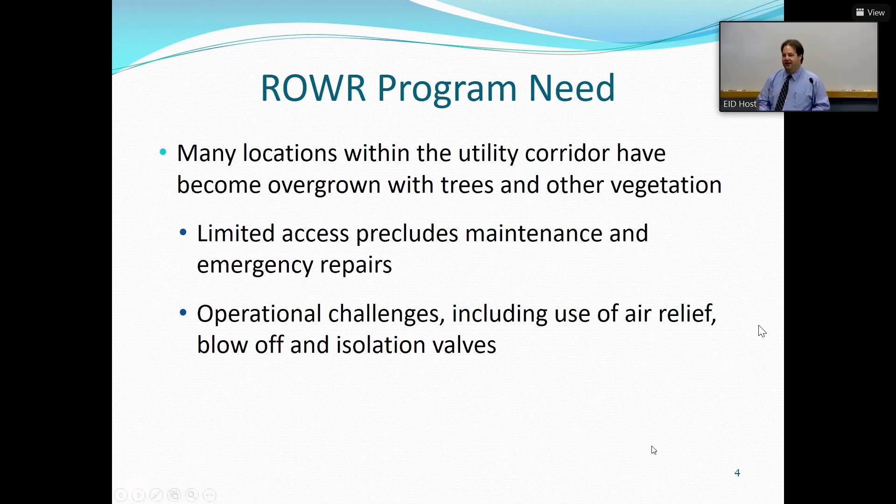Continuing the summary of issues, we think it's important to provide you with a summary of issues and an update on what has been happening since implementation of the ROWR program.

District crews are currently completing work along Camino Conduit. That work has been mostly located on EID and federally owned property, as well as some private property in the Pollock Pines area. It's important to note these are also areas where no sensitive resources are likely present, and the current work qualified as exemptions under CEQA.

The ISMND for the program is intended to streamline the ROWR activities. Since the program will cover the whole 88-mile transmission system, the ISMND will provide a roadmap for staff to follow, so resource surveys and regulatory authorizations can be completed in advance of crews working in sensitive areas. To summarize the benefits, it's time consuming and costly to move heavy equipment around. It'll allow crews to work in a linear fashion, and the program roadmap would ultimately result in more efficiency and cost savings.

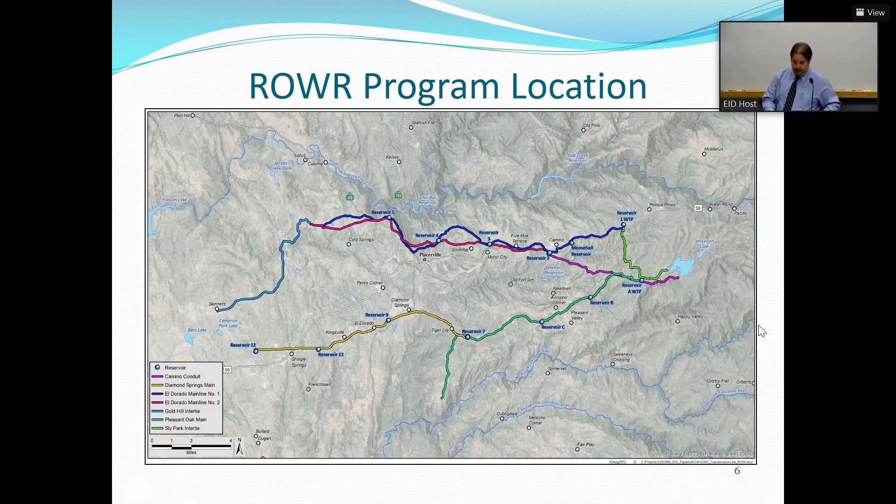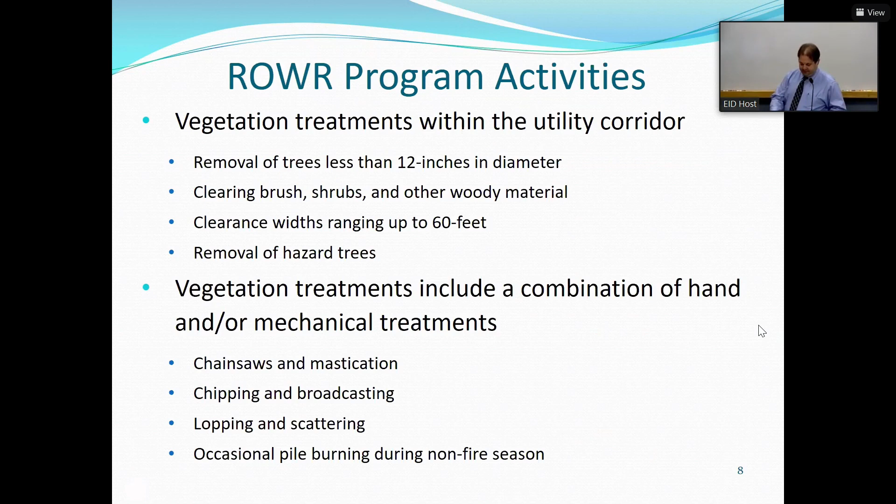Now I'd like to provide you with more detail regarding the environmental review process for the proposed program, which means prior to approving the program, EID must consider the potential environmental effects of implementing the program. As board members, you're aware the district must comply with the California Environmental Quality Act, or CEQA, the CEQA guidelines, and EID's procedures to implement CEQA.

The purpose of CEQA is to describe the potential environmental impacts of the program, identify ways to avoid or lessen those impacts, and then promote coordination with public agencies and encourage public participation. CEQA also provides agencies and the public an opportunity to engage in the review process as well.

The activities necessary to implement the ROWR program require environmental review by the district pursuant to CEQA, where EID is the lead agency under CEQA. Staff prepared an ISMND, which evaluated the potential environmental effects associated with the program. The ISMND resulted in a mitigation monitoring reporting program, which essentially provides the roadmap for crews and staff, and identifies the feasible mitigation measures that avoid, mitigate, or reduce potential environmental effects to a less than significant level.

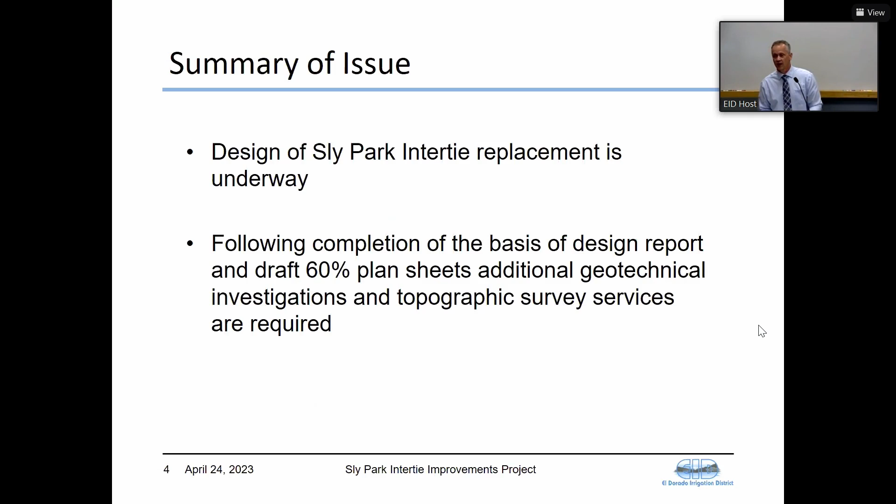Summary of the issues why we're here today: again, we are under design for the Sly Park Intertie. We've completed the basis of design report and draft 60% design of the project. During that process, we've identified additional geotechnical investigations that are needed, as well as additional topographic survey services.

So again, this is an overview of the project alignment. The project extends from Reservoir 1 down to Reservoir A, just downstream from Sly Park Dam. Our initial hope during construction was that we have easements in place and that we could basically replace the pipeline in place, and largely that's the case.

However, as we've reviewed the initial survey data that came in, our title documents, and aerial data, we've discovered several areas along the pipeline alignment where we're going to have to vary the alignment, shift it left to right, 5 to 10 feet. That's for numerous reasons. One is that, again, when this was built under emergency conditions, we didn't optimally place the pipeline. So in several locations, the pipeline butts right up against property lines, which makes it non-constructable in the existing alignment.

So the largest reason we're doing this geotech work is to minimize risk, both for the district for change orders as we get into construction, and also to minimize the risk premium our contractor will put on by identifying the soil and what they're going to have to dig through if any adjustments are needed outside this alignment, which we are intending.

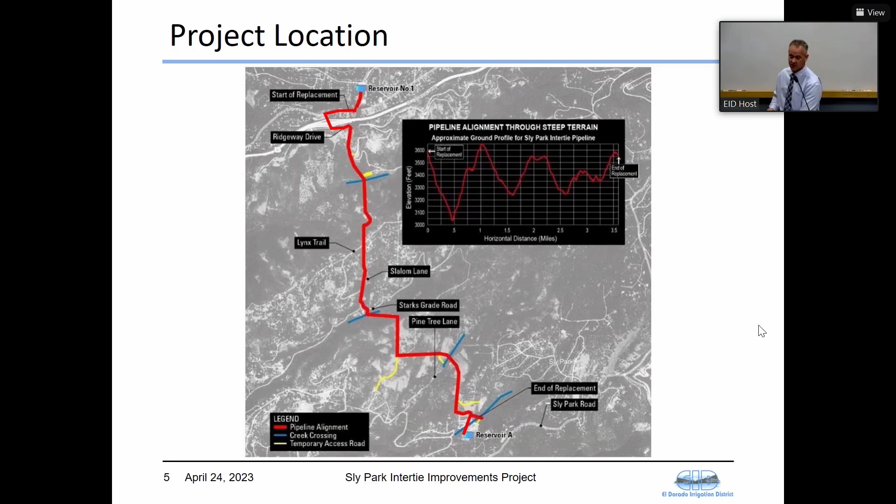So again, that larger background geotechnical analysis is going to require 8 borings along that pipeline alignment, as well as 9 geophysical refraction surveys, which help us identify the density of the rock and soils we're going to be digging through. The second scope: as we go down the hill from Ridgeway down to the bottom of Weber Creek, we've identified a potential mill site where they had deposited woody, basically sawdust, over our pipe.

The extent of that sawdust will really determine whether or not we can reuse that alignment and easement in that section. So we're going to have some pretty extensive investigations. We're going to basically have to dig up and identify where the pipe is and the depth of that fill, which could be up to 30 feet. So that's a significant effort.

And then finally, at Reservoir A, we're going to go ahead and pothole. Initially we intended for the new pipeline to terminate basically at the north end of that site, but due to hydraulics and the configuration of the site, we're going to extend it all the way through the Reservoir A site to the south end, where the POM hooks into the clear well at that site.

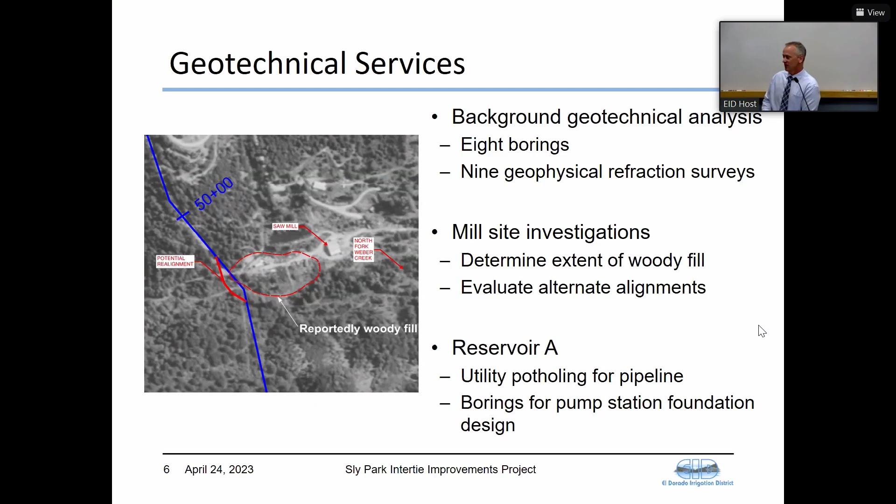In addition, we've identified some additional work that we previously approved for this project. Unfortunately, both those segments were not included in the initial surveys. So the first is what we call Segment 1, which extends from Ridgeway up to our Sportsman's Pump Station along Pony Express Trail, and Segment 3, which extends from the north side of Reservoir A down to the south side where the clear well is. So we're requiring additional survey in those areas, and then tying in that pothole data to our final design.

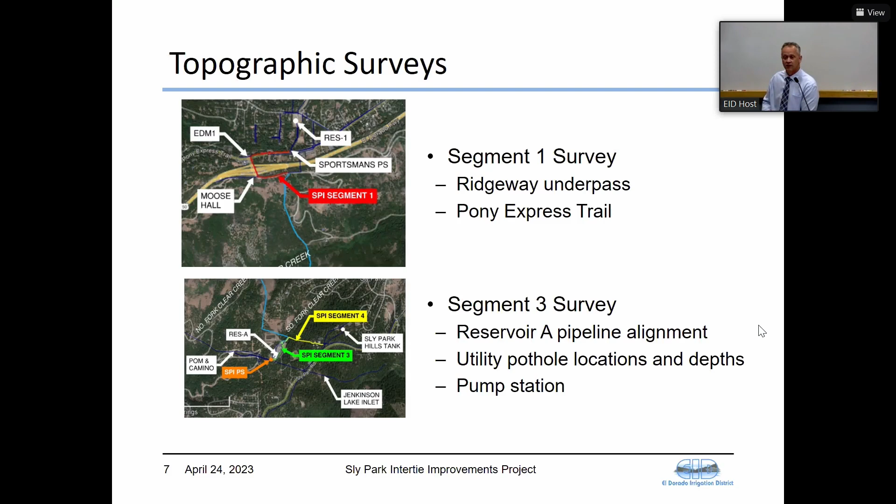So our funding request today is for additional geotechnical services through Waterworks of just under $125,000, and additional topographic surveys for $21,680, for a combined total of $146,668. Normally we wouldn't approach the board for an on-call contract for $21,000. However, our previous survey contract was $90,000, so that puts us above that threshold where we require board authorization.

Just a summary of where we're at on funding and schedule. We have secured $750,000 in grants to offset our design work, as well as $10 million for construction services. The remaining portions of the project will be paid for through a 2024 bond issuance. We are still planning to go to construction next year, so we're planning on wrapping up design right towards the end of 2023, as well as our environmental permitting efforts.

As far as board options this morning, staff is recommending option 1, which is to approve contract amendments to Waterworks Engineers Incorporated in the not-to-exceed amount of $124,988 for geotechnical investigations, and to Area West Engineers Incorporated in the not-to-exceed amount of $21,680 for additional topographic surveys, and to authorize additional funding for the project of $146,668 for the Sly Park Intertie Improvements Project, project number 21079.

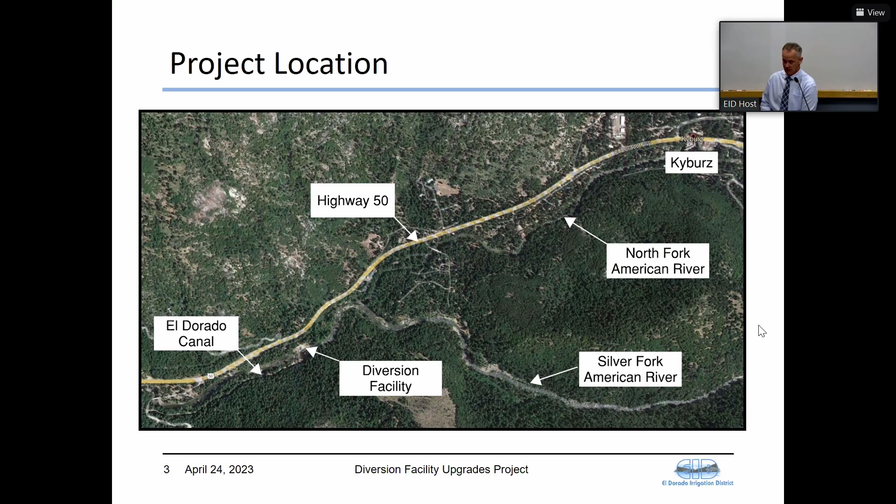A little background on the project. As I mentioned, we're located near Kyburz.

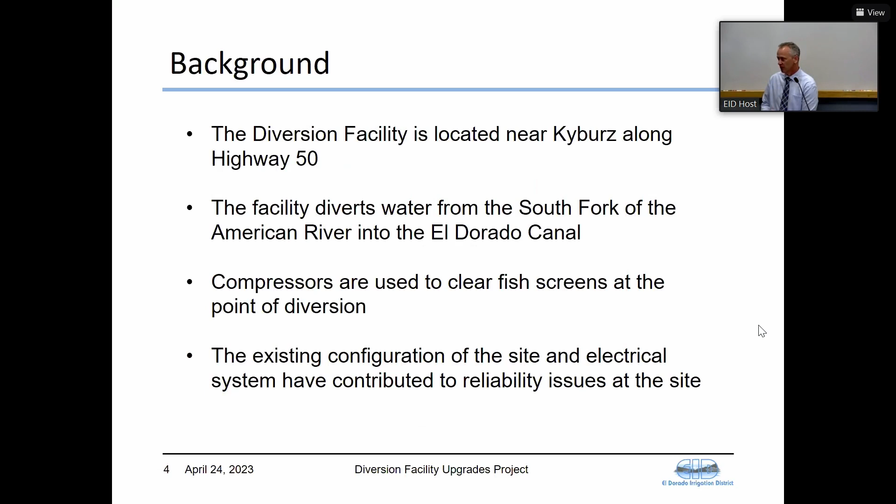There's a set of compressors at the site used to clear fish screens, which are required for our regulatory requirements. In general, the site has been scabbed onto multiple times, to put it bluntly, so it's a mishmash of electrical systems, and the reliability of the site has been in question.

So there are three main drivers for the project. One is that the existing compressor equipment used to free debris from those screens is located inside our existing electrical room, housed right next to our network equipment and electronic controls.

And again, we have a substandard electrical system and a backup generator that's a little less than reliable, and also undersized to power the entire site.

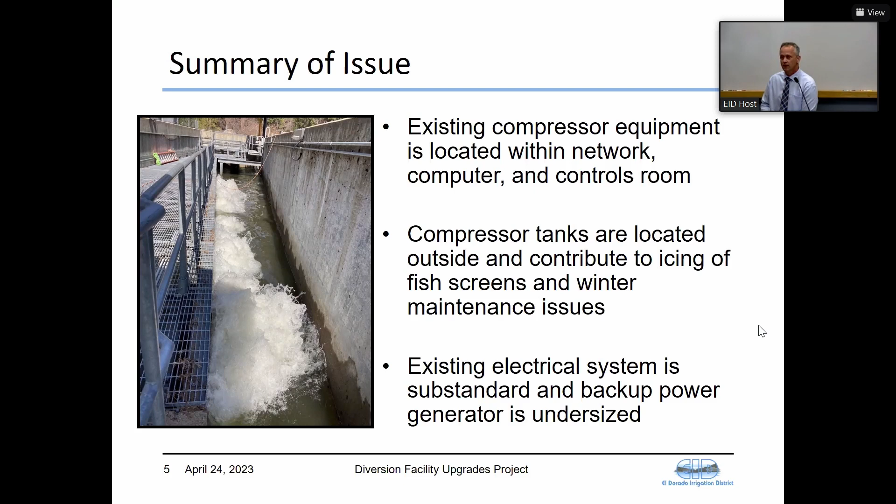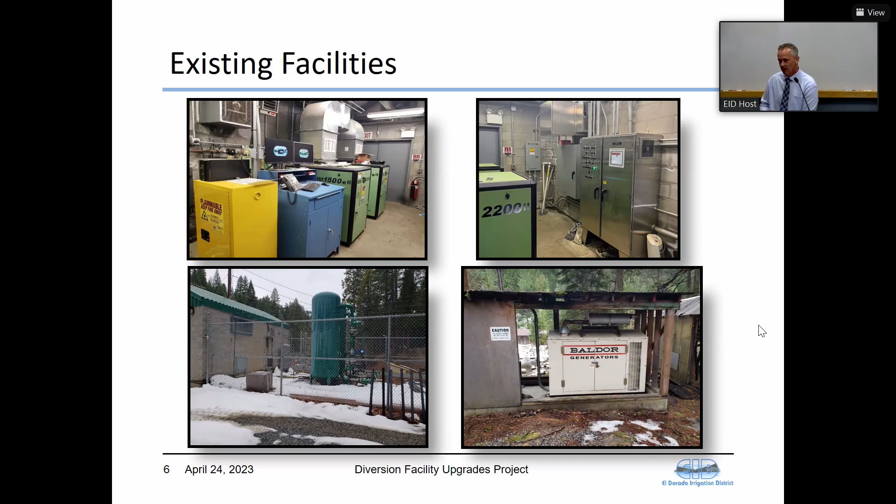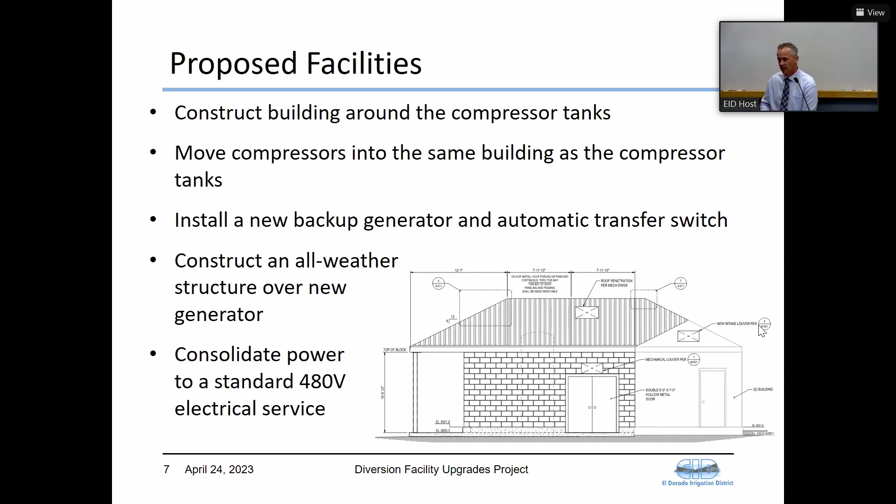The proposed facilities and construction under this project is to construct a building around those tanks. On the bottom right, the white portion of the building is the existing controls building that the compressors are in. We're going to extend that building to the north to house those two compressor tanks, and also move the compressors from within the electrical portion of the building to right next to the compressor tanks.

Can I ask a question? You talked about... there it is, I'm sorry. The question I had, going back one slide, I don't want you to move it, is about the internet connection, at least the computer connection. You identified where the two network workstations are, so close to the ventilation compressors.

Correct, yeah, and there was a lot of dust. Now the real question, I think, is if you need to upgrade that equipment, how does the communication go between the server and the main office? I believe we have a designated T1 line there. So you do have that, okay.

So the internet connectivity is not necessarily the issue. We're more concerned about the longevity of the electrical equipment and components in the building. Sometimes the equipment can get overheated, and anytime you have air rushing through an electrical room, you usually want that filtered at a minimum. Ideally you just take it out of there so you're not mixing process air with the clean air the electronics prefer, or you need another filter inside the room. Correct. Okay, thanks.

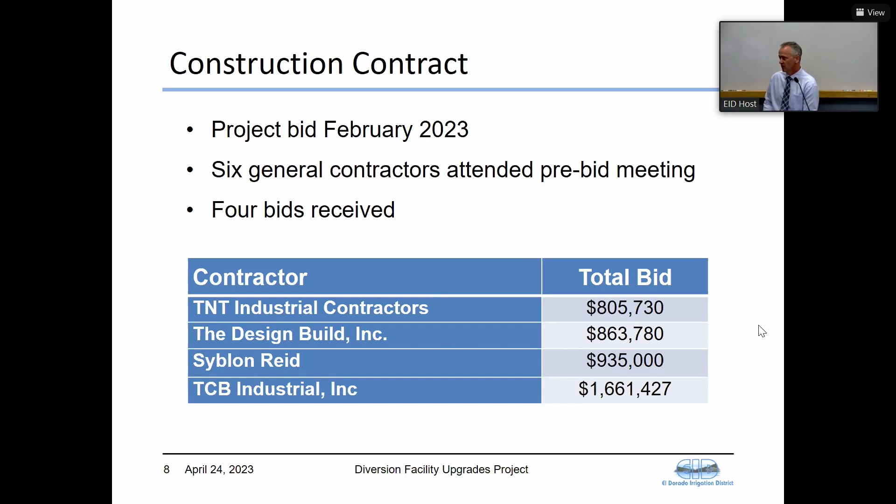Moving on to the construction contract: we bid this project beginning in February of 2023. We had 6 general contractors attend the mandatory pre-bid meeting, and we ultimately received 4 bids, which are listed. Of those 4 bids, we believe the top 3 are within a reasonable band, so we believe we have a competitive bid.

It's important to note that we previously bid this project. We had a much wider band, and I think we had 3 proposals on that. At that point we rejected all bids, refined our approach, and rebid it this last February.

It's also important to note that the bid price substantially exceeds our engineer's estimate. However, I think this has been typical of what we've seen lately, both here at the HQ Backup Power project and most recently in our Deer Creek blower project, in that inflation is hitting us, especially with anything involving electrical equipment or electrical services.

Again, we believe we've received a competitive bid, having the first 3 bids within about 15%. This project is exempt from CEQA, and if the board approves, staff will file a notice of exemption with the county.

As far as project funding goes, we are asking for funding for the low bid in the amount of $805,000, construction engineering services through the design consultant for $77,000, capitalized labor $60,000, a project contingency of $94,000, for a total funding request of $1,037,091.